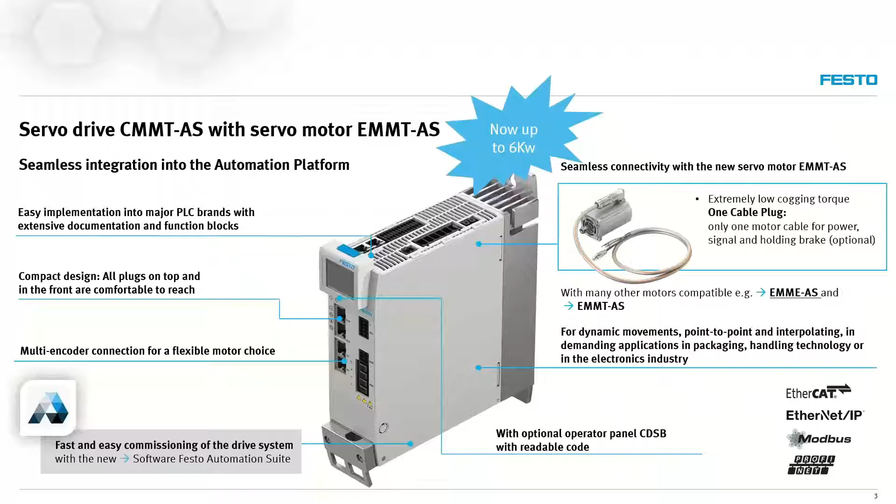So why would a customer be looking at this? Like we said, it's quite a highly compact solution. It's actually the smallest power-to-size ratio out of all of our competitors. So of course, for a customer, that'll save panel space and require less cooling.

We also look at the fact that it can be parameterized directly from the PLC. So imagine being able to, at 2 o'clock in the morning, replace a drive that's blown, and with the coding on the PLC, let's say on the HMI, you push a button, it sends the parameters down to the drive, and you're back up and running.

No technician, no laptop, and you're back up and running. Of course, the flexible protocols, like we mentioned, so for the main Ethernet-based communication, so Profinet, Ethernet IP, and of course EtherCAT.

One of the biggest benefits, I believe, is that we can program both our stepper drives and our servo drives from the same platform, so Festo Automation Suite. So for the programmers out there, it's one platform that can do both stepper and servo with the same function block, meaning it uses the same material to program.

And that's where it really comes into play. One of our biggest trump cards with our stepper drives is that we can run third-party motors, and that's of course with brake or without brakes. All of that is done here at the Experience Center based in Isando.

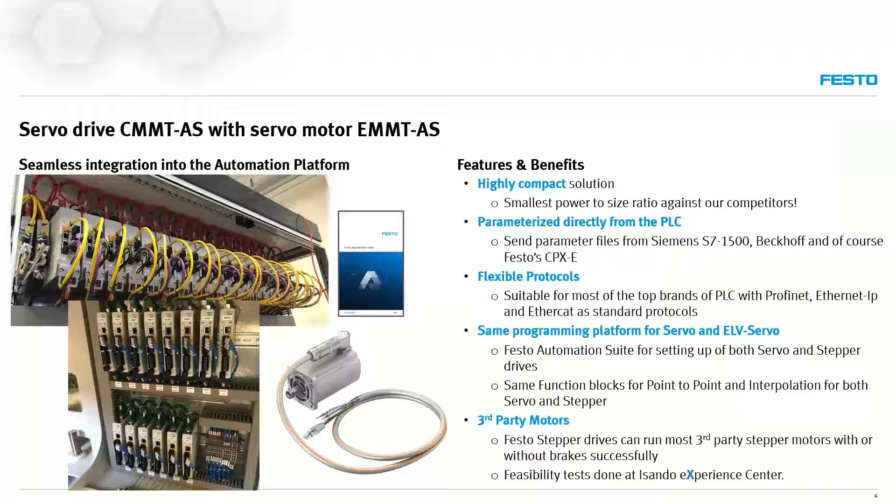Oh, perfect. Thank you, Marcus. On that note, from my side, I would like to introduce a pneumatic product. So this is a brake system.

If you take the example of a vehicle, your motor vehicle at home, you may know that your vehicle has two brakes. You have a dynamic brake, which you use during driving when the vehicle is moving to slow down or stop your car, and then you have a static brake, whereby if your car is parked or standing somewhere, maybe on an incline, you'd want to prevent the car from going anywhere, so you pull up your handbrake.

Similar to that, we've got the DACS, our pneumatic brake system that's completely new, just been released into the market. The big factor that's changed from what we had previously was that we didn't have the paper, the documentation to go with it - the statistics on how many cycles we can do, what's the B10 values, the lifetime expectancy of this brake, which is now part of the new system.

So we have tested it to conform to European standards in terms of safety, and this is a really wow product that we can use now. So the DACS, or DFLC, DFLG, depending if it is in combination with a cylinder or just on its own.

This is really cool - you can use it in multiple applications because all you need is a piston rod or a rod that goes through the brake so that the brake can clamp onto that rod, either completely assembled with the pneumatic cylinder or on its own.

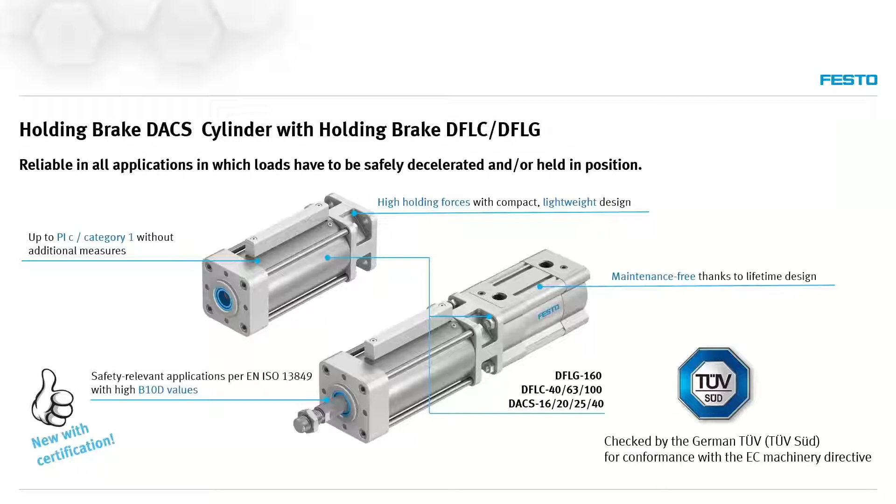Okay, so DACS, some of the features and benefits there for you. You'll see on your screens now some of the ratings, the rated lifetimes for the brakes that we have in our range, all the way from a size 40.

And what's new now compared to what we had in the past - we've never had above 100 size. We now have a DFLG 160. So it's a really big brake, about 7,500 newtons of holding force.

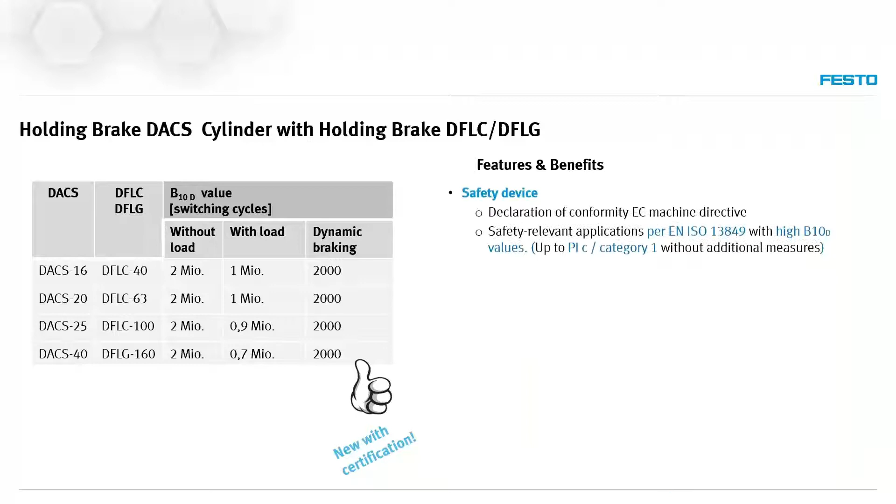It's really, really powerful. In terms of safety, the standard rating on the DACS is a PL c category 1 safety rating that we have standard with the brake without any extra features. If you, however, add sensing or regular checking of the brake, you can increase this to level D type safety rated device.

So keep that in mind for your safety applications, especially if you have press applications, vertical lifting items where pneumatics are involved, where you want to guarantee that in a holding situation or in an emergency situation, you're stopping your systems from running, preventing machine failure and also human failure. We don't want that at all.

So this could be a really good product for you. Static and dynamic braking, as I mentioned earlier, we have both features available. The static lifetime, of course, is longer. The forces involved are not as intense on the brake, so the lifetime of the brake under static loading is longer than what you would have under dynamic braking.

Maintenance free - a real big benefit here compared to our predecessors that we've had. It's maintenance free, so during the lifetime of the brake, you don't need to act or do anything to it. No maintenance, no adjusting, nothing. The brake works for the entire lifetime.

Performance - we've got higher holding forces than we've had in the past. We've improved the holding forces, and we've also reduced the weight of the component. So not only is the component lighter, which means you don't have to carry so much weight on your application, but also much stronger holding forces with the system inside.

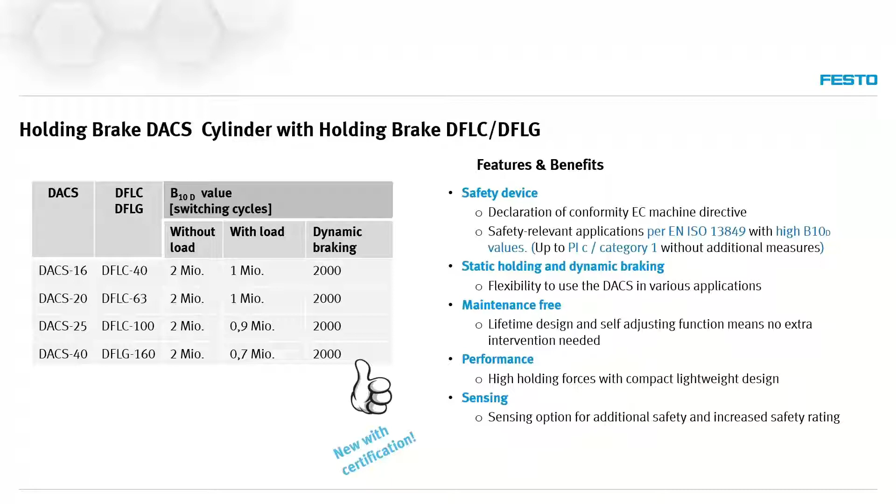So as you can see, very simple to install and easy to use product from our side. Thomas, the handbrake, I understand with these things, but what you just said about simple, it's like you're reading my mind.

And the product I actually want to take our customers through is the Simplified Motion series. In the past, Festo tried to bridge the gap between standard pneumatics and electrical axes. Electrical axes were always deemed more costly, and with the Simplified Motion series, we're looking at bridging that gap, bringing it closer with the added benefits of the pneumatic side.

There's a simple online tool, the online solution finder, which means the power sits in your hand as the customer. One of the benefits is that it's completely decentralized. We have a simplified motor, and all the control is done on this little keypad in the front - no need for laptops, no need for software, just straight there.

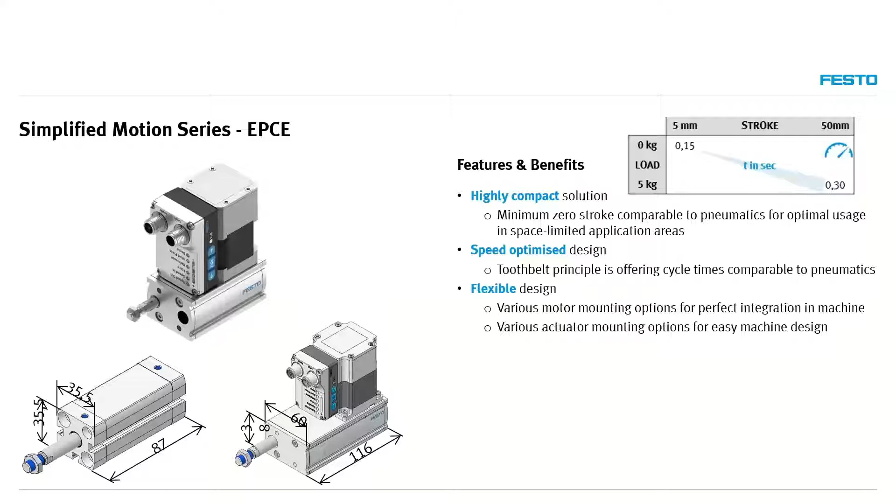It's also a flexible design - we've taken into account that we have to compete with the pneumatic side. If we look at the mounting, you can mount it in the front, at the back, or on both sides, depending on the application. The new piston rod options give you either a single rod, or a through rod system like on pneumatics, or perhaps a double cylinder where you can do a form of gating. It really gives you that type of flexibility.

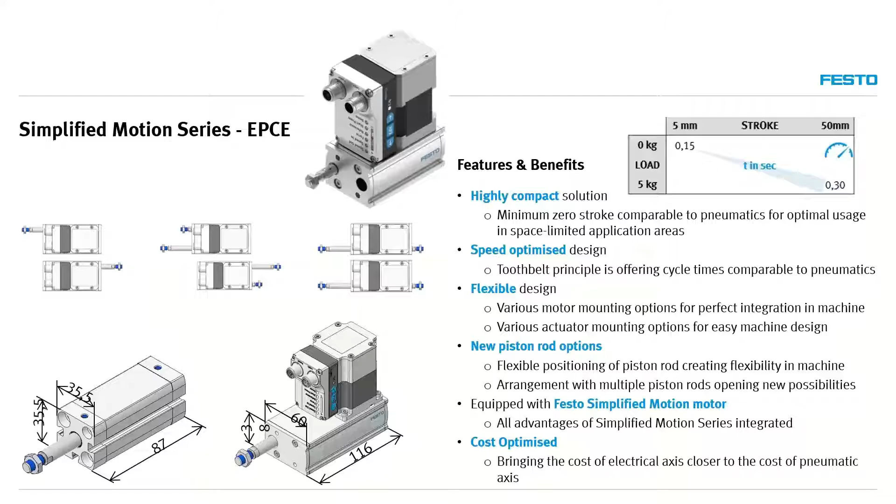Marcus, you read my mind. Speaking of cost optimized, I might have a product there for you for the process industry. So we're looking at process industry as a whole, right? We've got a brand new cylinder out onto the market for process industry.

You'll know this from general applications like wastewater, water treatment plants, any big bulk media that needs to be moved. We have cylinders that actuate gate valves, slide gates, sluice gate valves, pinch valves, any big linear gate applications where you require a cylinder.

It's a very cost-effective cylinder that does an open-close job, very slow speeds, low cycles, and therefore cost is quite critical. So we have brought out the DFPC, what you may know as a pancake cylinder, a pancake type cylinder. Very basic design, but very cost optimized.

So we have taken the best of both of our worlds. From the pneumatic side, we've taken our standard ISO type cylinders and integrated them with the more process-orientated side of the market, the DLP type range of cylinders, and we've created the DFPC. With the DFPC, we have both ISO standards integrated on the end caps - it's a tie rod type cylinder system with a Namur interface, and of course bore sizes.

Currently we've released 80 to 125 bore on the DFPC, which is available, and we'll increase this slowly over the course of the next 2 years up to about a 600 bore cylinder - the biggest ever cylinder size that we've had in our range.

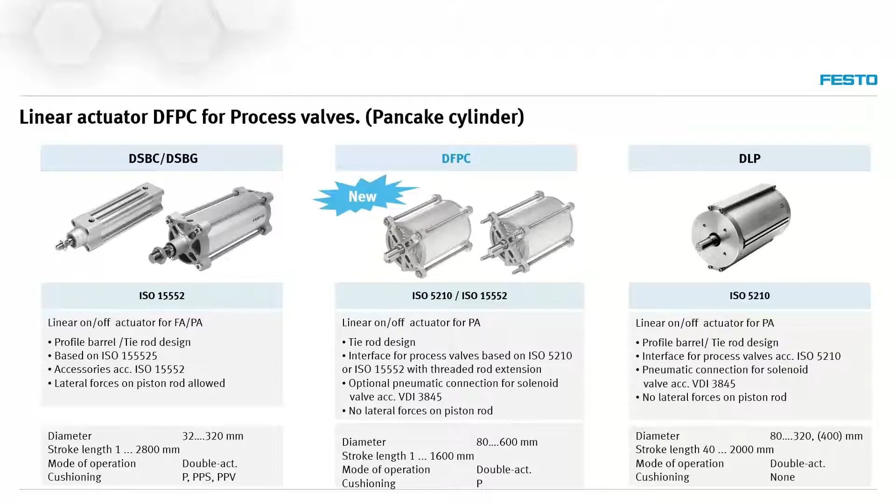Also keep in mind that in certain applications there's what we call a ram type cylinder. This is where you are pushing media that's very viscous, slow moving media like glue, very sticky substances, where you require a cylinder with heavy force, a big force cylinder, but really slow moving. So for those applications, this could also be the perfect product for you, the DFPC.

One of the key benefits here is being economical, a very cost-effective product for the market, so really bang on pricing. Complete portfolio, because of the ISO platform, we can now integrate some of the ISO accessories into the cylinder. We're looking at your clevises, rod eyes, FK alignment couplers, then also the sensing options for the cylinders.

All there with the Namur interface. You've got your Namur valve, so you can mount the pneumatic solenoid valve directly onto the DFPC. We've got the bore size range, we've released to 125 bore at the moment, but we will increase this all the way up to 600 bore. Our biggest cylinder currently in the portfolio is a 320 bore. So this really gives us an added edge to our product portfolio.

Then, of course, not to forget corrosion resistance. The cylinder has stainless steel components, so suitable for outdoor use. Keep your outdoor applications in mind for the cylinder.

All right, and with that, Marcus, do you have anything in the PA industry or PA range that you could show us from your side?

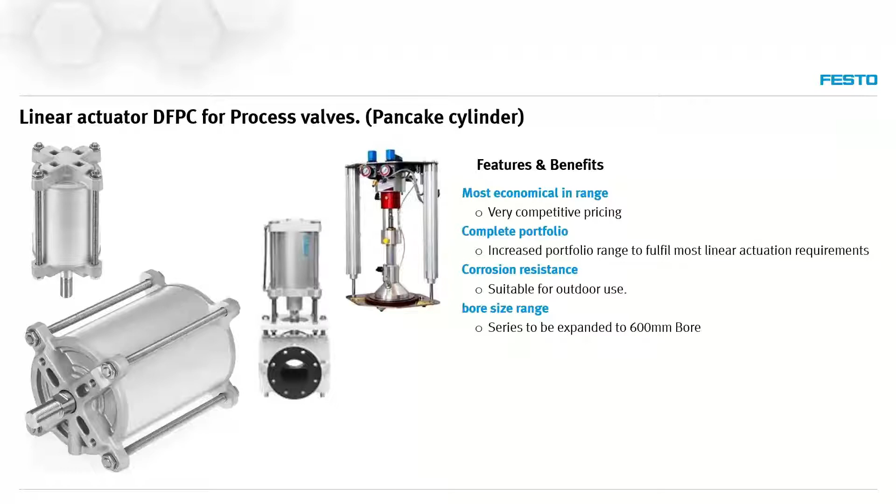Actually, I can, Thomas. And that's actually got to do with what we call the PA toolkit. The PA toolkit is a new standard of visualization that the process industry is adopting. If you look at the mass amount of PLC manufacturers out there, everybody's got their own standard, so the customer eventually has so many different options to choose from.

So if you look at the PA toolkit, it's what we refer to as a modular type package. It's standard animations, standard function blocks designed for the process industry, your PID loops, all of that standard graphics. And of course, that is available on the HMIs.

The HMIs are our new series of HMIs. The range is now expanded from 5-inch all the way up to 21-inch, so quite a nice big range of HMIs. And of course, these have an IP67 enclosure.

So with the PA toolkit, you need a bit of power behind it. All the HMIs are operating on Linux RT, so quite a powerful operating system, no longer Windows embedded, which traditionally was a bit slow. So quite a nice performance-based system.

You still use Festo's Designer Studio to commission the software, and you also have the option to do web visualization or remote target. So you can actually do the HMI design inside the Codesys program and display it on this HMI. We have 3 series of these.

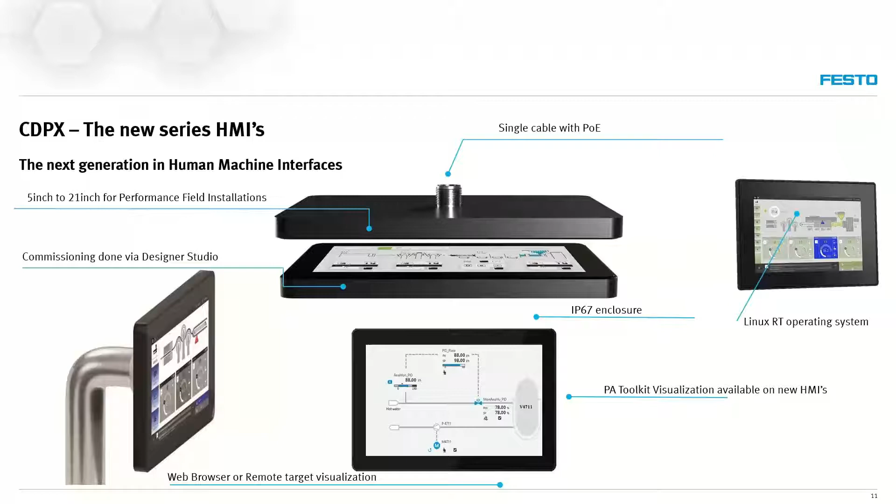We have what we refer to as the Performance Field series, which is the one that you see over there, which has power over Ethernet. It has one cable, which has Ethernet, the communication, as well as the power, meaning only a single cable into that HMI for the customer.

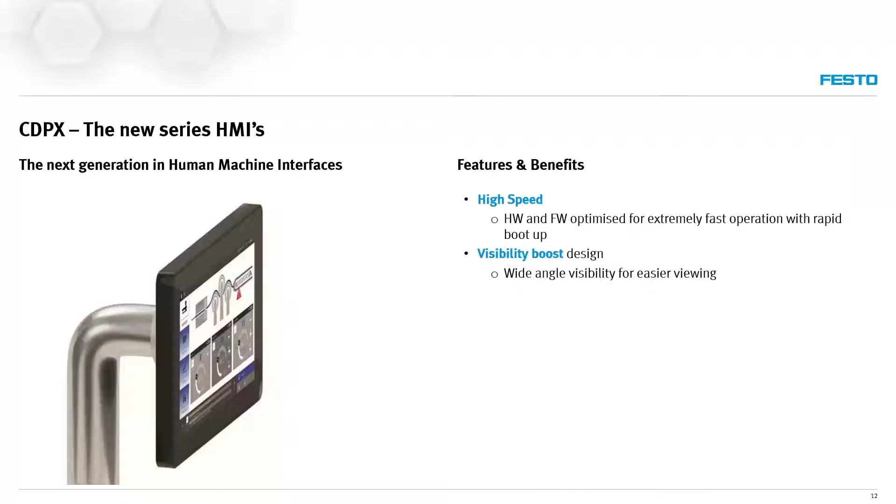Looking at things that set us apart from our competitors, we look at the speed being optimized by optimizing the hardware as well as the firmware. So we get a faster boot up from our HMI. For those of you that traditionally switch it on and always wait for the HMI to boot up, with these HMIs it's quite faster. Also improved visibility, so you've got a wider angle of view, and that's for machine operators that have to walk down the machine and still have a line of sight into it.

Of course, in the industry, we have to have some form of scratch resistance as well as UV and chemical resistance, and that's mostly because of the high quality glass enclosure that they've used.

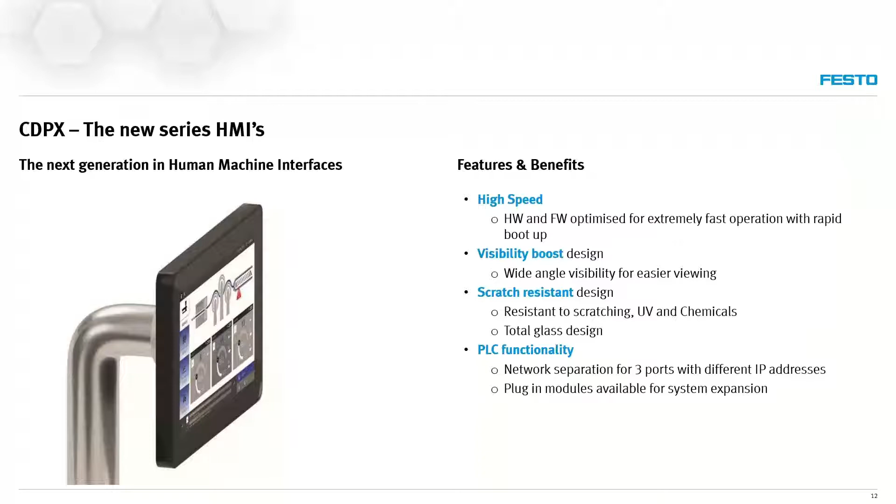And like I said, we've got 3 series: the Performance Field, which has PLC functionality included, so it has a full CODESYS version 3.5 controller inside. You just can't extend the I/O, but we do have a Performance Cabinet series where you can add the I/O. So it depends what you as the customer really require.

And for those of you that are budget conscious, we do have a budget friendly system called the B series, which doesn't include the PLC. So it is a polymer case, not designed for field installation, but for panel enclosure. Still has a very hardy construction, a resistive touchscreen, and supports HTML5 and, of course, OPC UA server and client. And, of course, a lot more cost-effective thanks to not having the PLC on board.

So with that, we look at a wide range of HMIs to suit our customers' needs.

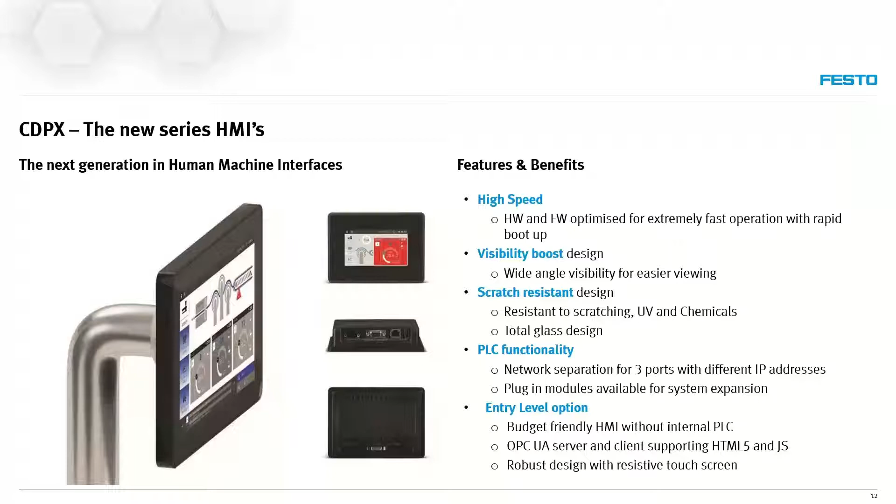Marcus, speaking of wide range, I might actually have a product for wide applications. That's an interesting point you make there, Marcus. So just a bit of a teaser here, something we'll release in the course of the year for wide applications. So if you have a big wide product that you need to grab hold of, this might be a solution for you.

We've got a DHPL long stroke gripper that we will release into the market now. The long stroke gripper, anything from about 20 to 200 millimeter gripping range. Really beneficial here for you would be that you can grip internal or external, so you can either hold the bottle from the inside or grip it on the outside. This allows for a lot of application examples or possibilities for this gripper.

Really nice feature. And then also sizes from a size 10 all the way up to a size 40 gripper, which gives you the option of forces between 20 newtons to about 500 newtons gripping force. 500 newtons, about 50 kilos, so it's a bag of maize meal - quite a bit of force behind this gripper. So really dynamic range for various applications.

Then of course another big feature of interest is that both sensor slots are included on this gripper. So no longer do you have to worry about which sensor you can use to mount on this gripper - you have both options available. So a standard T slot and a C slot integrated into the design.

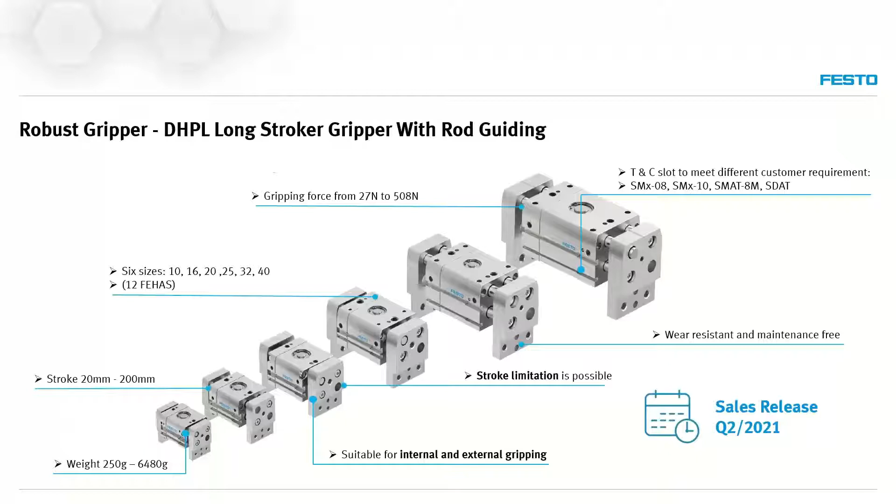And if we look at robotic sales globally, robotics is definitely on the up. So whilst we're on the topic of robotics, if we look at our electrical remote I/O, and where customers are trying to reduce costs, there's more ways than just buying low-cost components. It's thinking strategically, it's thinking futuristically. So if you look at our CPX AP remote I/O, that's ideal for OEMs or end users alike that have either decentralized systems or perhaps a system where the customer needs to add in additional I/O.

So the CPX AP is, of course, exactly the same as the rest of our electric automation portfolio. It comes standard with Ethernet IP, EtherCAT, Profibus, and Profinet. So with this, we give you high-speed data rate and real Industry 4.0 I/O for your industry.

And of course, that means you get things like cable diagnostics, valve cycle counter, and that's the information you need to be able to make decisions about your machine health. So it starts to introduce things like predictive maintenance.

And of course, all of this is done from a lightweight, small, compact little system that gives you all of this flexibility. So with that, let's have a look at, once again, why ours.

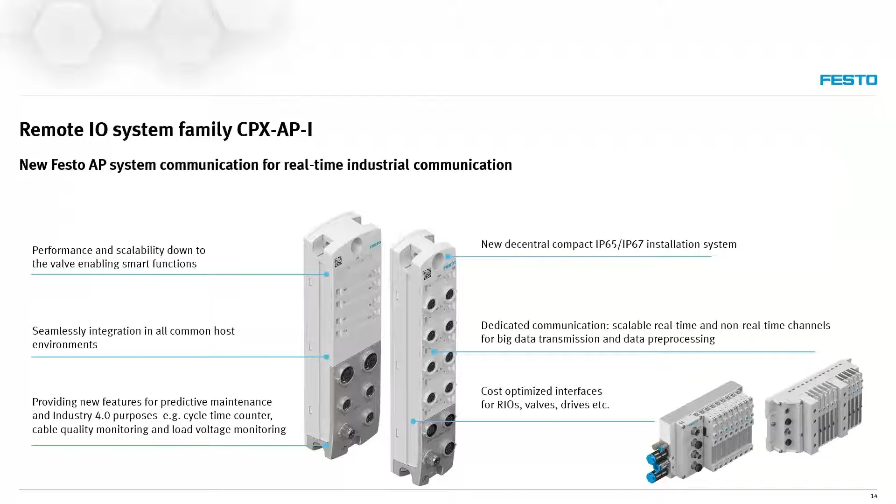So of course, high speed. If you look at our AP system, we can boast speeds of up to 200 megabits per second. That means data cycle rates of less than 250 microseconds, so getting data from the field at a high rate of speed.

So of course the flexible installation. Currently with this you can get line topology, and star as well as tree topology are coming. With that you can add 79 remote slave units, so one master can have 79 slave units.

And if you take into account the cable that you can run between units, 50 meters, imagine having 80 units with 50 meters apart - it's quite a distance. So you can have quite a long network running, with cable diagnostics that will tell you that between module 55 and 56 there's a problem, perhaps because of an energy chain. That, once again, Industry 4.0 giving you that type of thing.

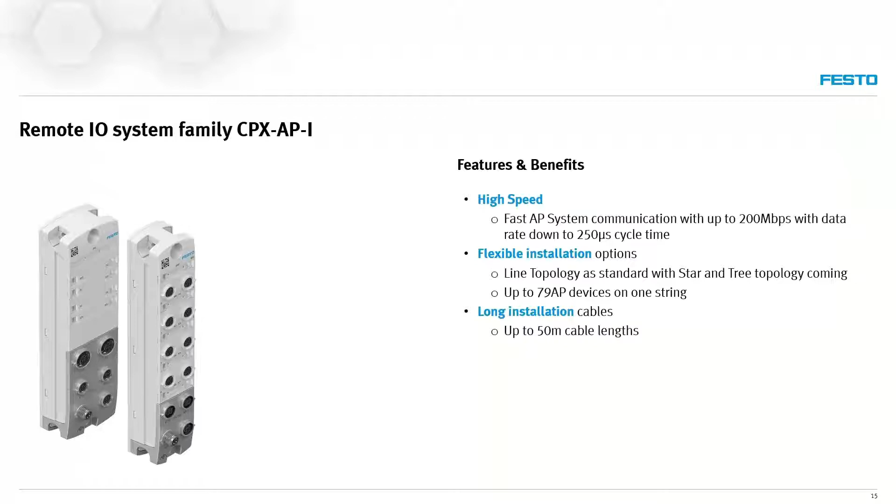So PLC integration, of course, I did mention Ethernet IP, EtherCAT, Profibus, and Profinet for the master AP unit. And the communication between modules is, of course, our Festo AP. But compared to the rest of the guys that have remote I/O, everybody has a similar system in the background - their own dedicated communication, with a communication port into the main PLCs.

So one of the biggest things about this is, of course, predictive maintenance, and that's where we need to go. We need to improve the overall effectiveness of the machine, so your OEE, get that up, and reduce breakdowns.

So imagine being able to say that that valve is nearing its end of life - change it before it breaks. Now you can schedule the stop. Your production planner is happy, your stock planner is happy, and your maintenance planner is happy. Of course your KPIs are met. And of course, all of that with cable quality monitoring.

So robotic applications is where we're ideal because of small, compact size, lightweight. It's ideal for robotic and energy chain applications.

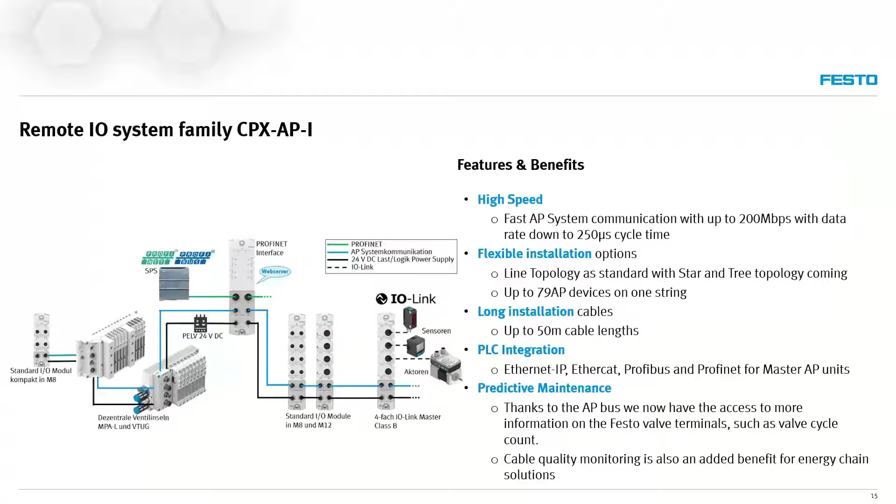Oh, thank you, Marcus. Speaking of compact and small footprint, I also have a product for a very small footprint. So we have our standard DSNU series that you should all be familiar with - our round bore cylinders, applications that have been around for 30 years.

They've recently gotten a facelift. We've automated the production process, so they're completely 100% automated. But with that, we've added a second range to the DSNU, which is the DSNU-S, the S being space optimized. So the idea here is to really save space and weight in your applications.

As you can see with the DSNU-S, you're up to 3.5 centimeters shorter than a standard DSNU cylinder. You're up to 40% slimmer. So the whole design is slim, sleek, flat, smaller.

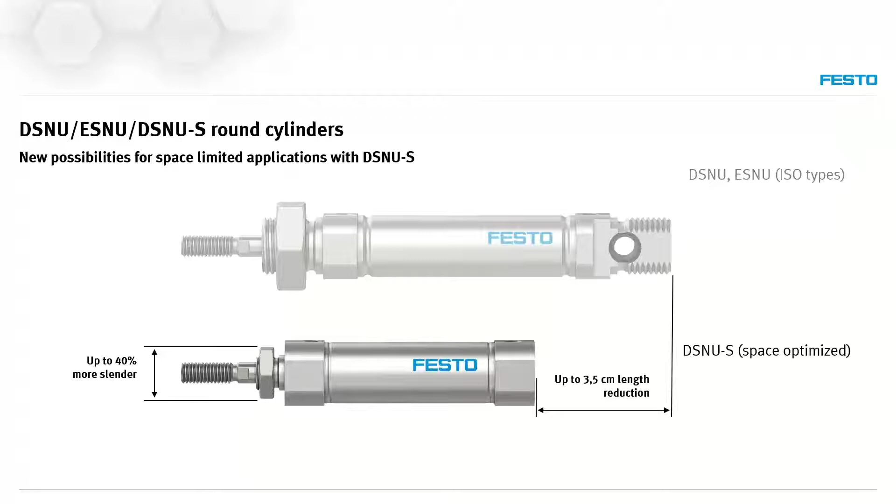So really for your tight applications where space is critical, where you've got no room to maneuver, or you're interested in weight - as little weight as possible when you're moving items - this could be the perfect product for you. Keep that in mind with your designs or systems. Think of conveyors - they tend to be very tight in space to move levers or items on the conveyor, so this could be a really good product for that kind of application.

So just some differences to note. The DSNU-S, being more compact, is not an ISO series type cylinder, so it doesn't conform to ISO. In order for us to get it as small as we could, we had to do away with the ISO type system. But that also means it's not interchangeable with the standard DSNU and has different thread types.

But that is the focus point here, being that it's small and sleek and slim. So the range focuses on the smaller bore sizes, from an 8 to a 25 bore, and then just standard P or PPS type cushioning.

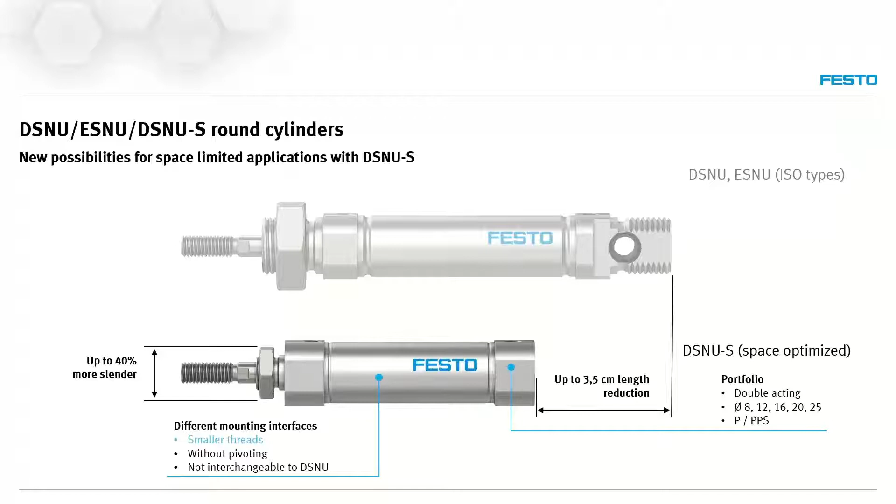So Thomas, on that point, is that why we're presenting here? You the slim and I'm the not so slim. I'm seeing where you're going with this. Thank you, it's all sleek here.

So from the standard DSNU range, as you know very well, a very versatile system with lots of options on the DSNU range, I just want to highlight two that we've added recently.

One is a Viton type seal, front seal for better chemical resistance - for certain chemical applications you could use a Viton type application. And then, of course, another version, we've upgraded our low friction type cylinder for DSNU. So keep that in mind with the DSNU range - there's a low friction application cylinder.

Accessories for the DSNU-S. Keep in mind, because it's not ISO, the standard ISO accessories don't fit. But we do have special accessories for the DSNU-S, still available for your applications.

Reduced commissioning time. We're about to release our SDBT, our programmable sensor. So instead of the standard reed switch, we now have a programmable sensor that we'll add to our cylinders, which means no longer do you need to set up cylinders. You put it into the end position, connect it, leave it. Once you start the system, the sensor will program itself to its end position and give feedback to the PLC.

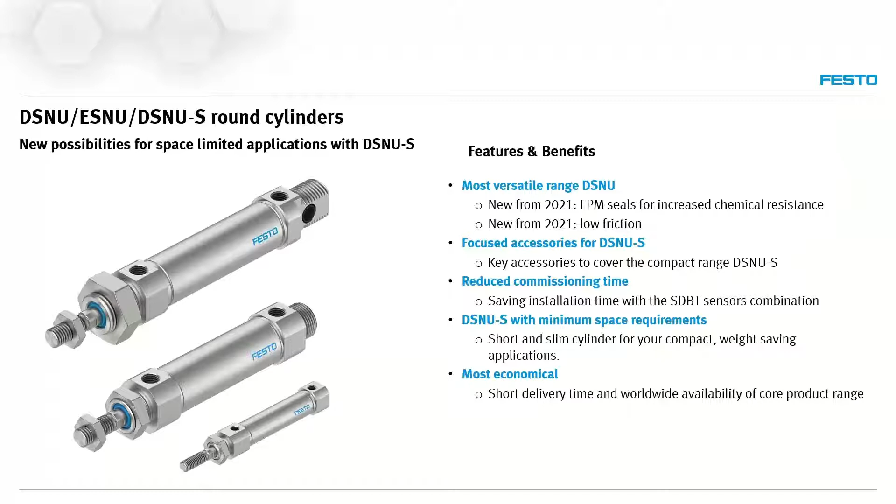Talking about economical, if we look at the mechanical industry - our belt drives and ball screws - there too we need to look at more economical solutions without cutting on quality. So if we look at the new product range, the ELGT, it's a completely new design. You'll perhaps see it looks completely different to the Festo traditional systems, because we need to be competitive in the handling systems.

In the ELA, electronics and light assembly industry, we have two types of scenarios: a cantilever system, which you'll see on screen, and a gantry, which I'll show now, where a gantry has a second axis to support the load. That means an additional axis, additional cost, just to carry half the load.

So what Festo did is look at the market out there, look at the requirements, and based it on what our customers need.

If we look at the system, we have the option of a hard cover - that's one of the first new things you'll notice - and the actual axis moves around it on the side. You'll be able to see the carriage is actually on the sides of the hard cover, which gives it the flexibility of being able to put your own carriage plate on it to mount whatever you want.

So let's say you've got a camera on there, or perhaps a barcode printer, and you want to be able to move it up and down. You could make your own adapter plate to suit your application. That's convenient - definitely.

We've got three sizes, starting at 90, then 120 and 160. What I like about this design is that 90 is 90 millimeters wide, 120 is 120, and 160 the same. The guiding is where the actual benefit comes in.

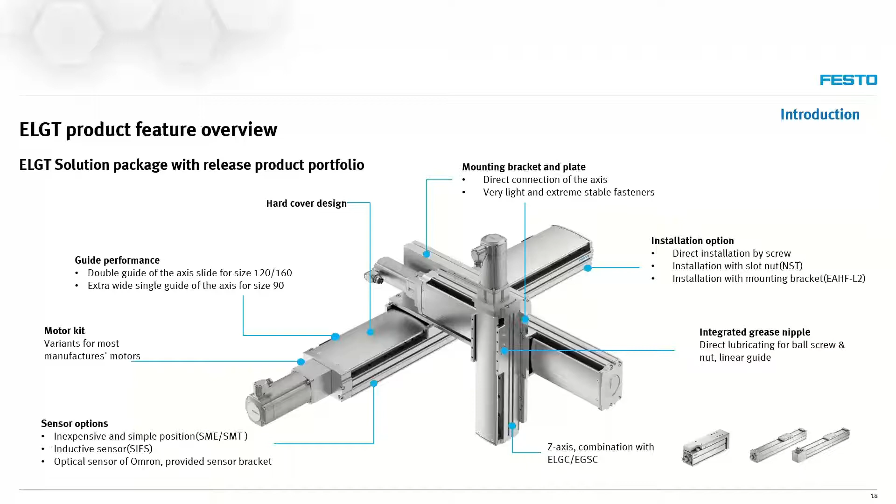So showing you from a supply perspective, from a mechanical aspect to the electrical connectivity, and of course the intelligent connectivity with that. We've managed to get rid of the second axis, which saves the customer not just the maintenance aspect, but a cost aspect as well.

We've looked at flexible motor options. With the majority of our customers having the flexibility of choosing the servo technology, we have axial kits that can handle most manufacturers out there in terms of motors.

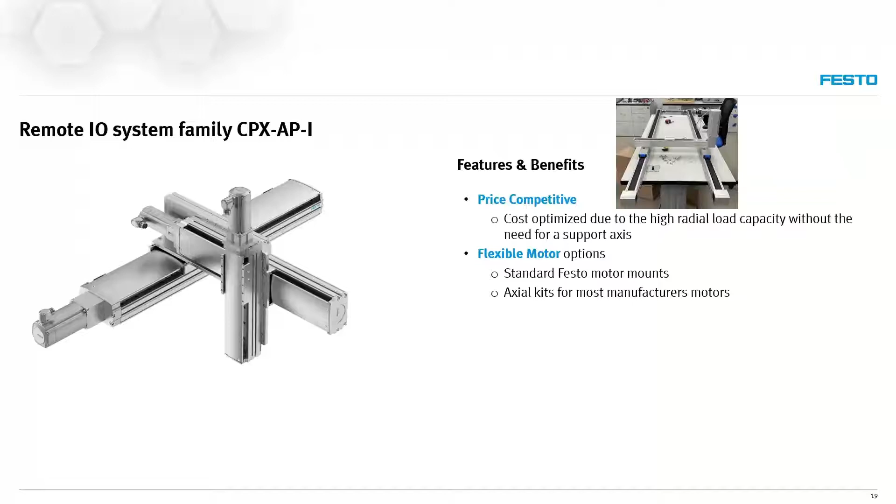We did mention the flexible mounting options. That really stands out to me, being able to mount it with a profile, slide it up and down for alignment, and give the customer the accuracy that they really need.

And then, of course, direct greasing points. So for the size 90, with having one guide, there's only one grease nipple. On the size 120 and 160, two grease nipples, one for each of the guides you get in there, and a secondary grease nipple for the spindle nut. That is ideal for regular maintenance and to ensure that your system is dirt-free, contamination-free, and will get the life cycle out of it that you require.

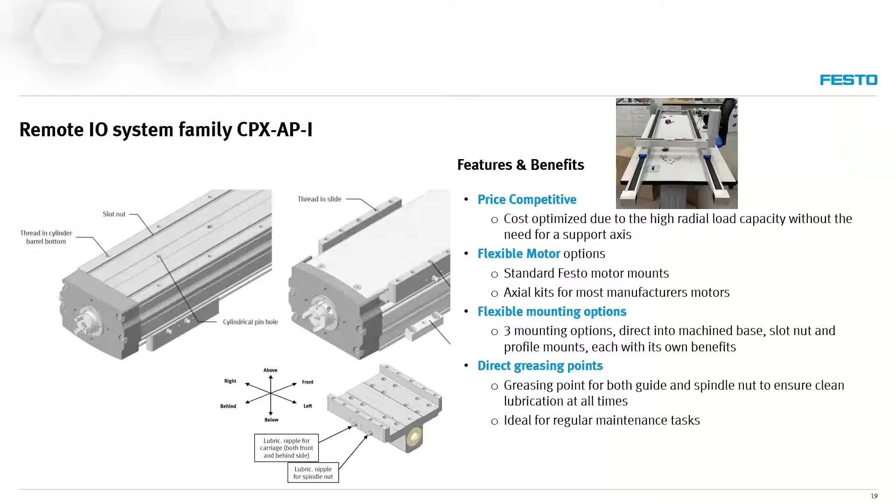That is interesting that you mentioned maintenance, Marcus. I might have something there for you. Moving us a little bit away from the standard products, heading more into a software type environment, we have a maintenance system, a tool that will cover your maintenance tasks in your plants, your production lines, or your machines. If you are involved in maintenance, we have what we call Smartenance.

Smartenance is a software tool that will manage your maintenance processes for you, whether managing your day-to-day maintenance on your machines, or even the breakdowns, looking at what is required for maintenance and giving you an overview.

Smartenance is really, really flexible because you can define how you set up Smartenance, be it for the machine or for the production line. You can add multiple machines, you can add multiple lines, so you have complete autonomy over how you want to structure your maintenance system.

With Smartenance, you have the ability to actually control what is happening in your maintenance environment. You're going away from the pen and paper type environment, trying to make little notes on whiteboards, etc. Everything is now on the web.

With the license system, we have different licenses, as you'll see on your screen. The basic license will be just the autonomous maintenance management system, but as we go up with the advanced and premium options, we have added features.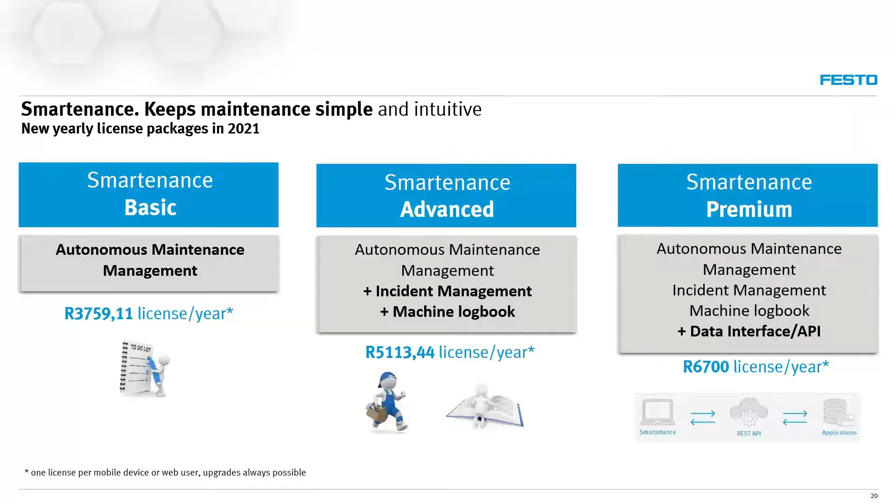So some nice benefits for Smartenance. It saves you time, moving away from pen and paper and having to remember what were the maintenance routines on the machine last year. Once you're logging everything online, it's saved for you on the cloud, so you have exact reference of what has happened for your machines, and you can improve your maintenance. Of course, efficiency - it's online, available 24/7, data is always there for you. You can really use that to your benefit.

Easy rollout. Smartenance is very intuitive, easy to use, easy to set up - sign in, create your machines, create your tasks, easy to attach links. So the staff on the shop floor, the maintenance team, will have access to links, videos, tutorials, documentation - everything's available for you to link in Smartenance.

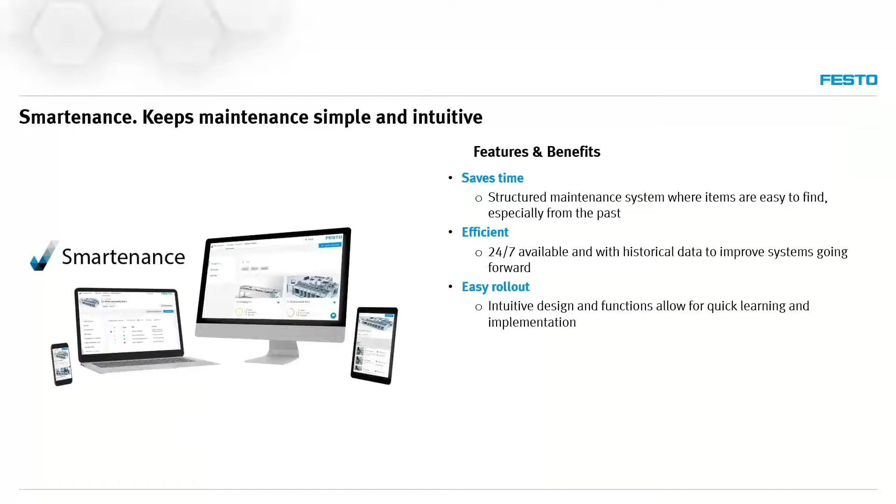It's educational, because with all of this information, you can use Smartenance as a platform to train your maintenance teams. So if you have new personnel or you're changing personnel, it's a very easy way to show them how maintenance is done on certain machines, what is required, what the tasks are, and when they're scheduled for.

Really cool. And then, of course, the Industry 4.0 aspect here - with Smartenance we're going to another level. We're going from the product level into the cloud environment. We are saving information, we're sharing information, we are starting to become smart in how we deal with information. So no longer reactive, but proactive. We're working towards stopping things before they even happen, to reduce your total cost of ownership on machines, making them run efficient and effective.

So, Thomas, on that, if my wife wants to buy it, please don't, because I don't want her to have the control of all of my maintenance tasks.

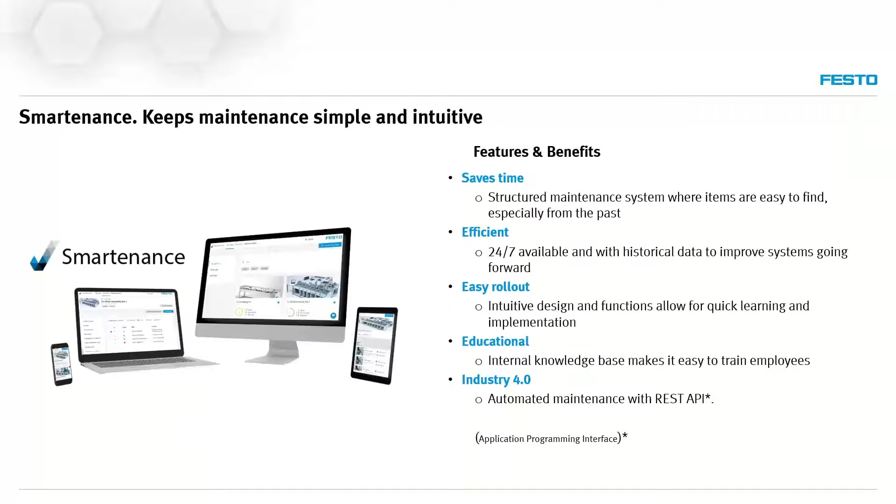But whilst we're on the topic of software, Festo globally has recognized that there's a need for going digital. So when we look at tools, they can also be digital, and that's where Festo's tools really come into play. If you look at the new electric sizing, which is a simplified design tool system, the customer has the flexibility of calculating from a single system to a multi-axis system. And of course, available on our website, that's where all of our tools are located - from electric sizing to HGO, there's so many different options.

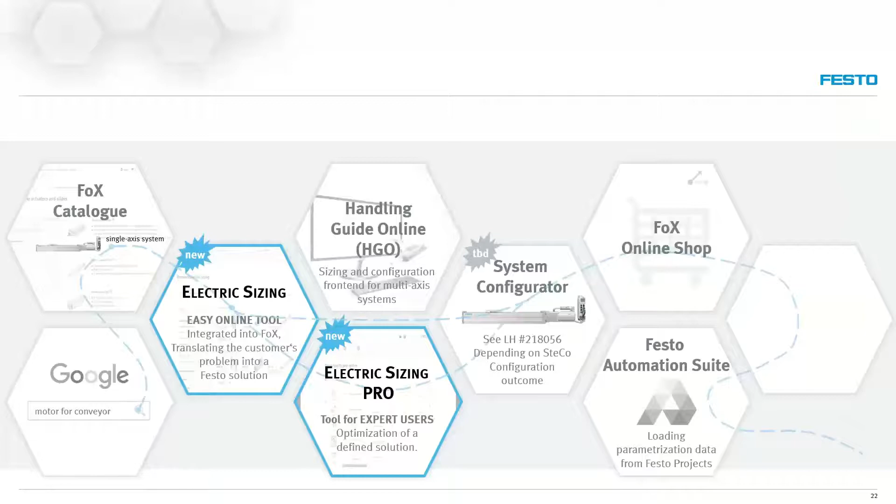Did you know that roughly 80% of a machine's cost is made up of things like the conception, the design, the drawings, the commissioning - that's where the real cost comes in. So Festo's tools are designed to actually reduce those costs, the intangible costs which are difficult to justify at the end of the day. So imagine being able to do a design of a machine in a fraction of the time - that's where the value sits. If you monetize that and say I've saved you 3 days of design time, you can equate that to 15, 16,000 rands worth of saving.

So if you look at some of the Festo tools we've got to offer, we start with Positioning Drives - that's free software you can download, and in that you can do calculations and it will give you solutions based on your dynamic characteristics. We also have the Handling Guide Online, one of the proud tools of Festo, where you can design a system with an energy chain, with all the brackets, motor, sensors - everything included, in under 5 minutes.

And that's where we really look at, even a day's design is roughly 8,000 rands of design cost that you've done in 5 minutes. Wow, that's really incredible. If you look at the Simplified Motion Series online calculator, that gives the customer and the sales engineers the benefit of being able to do basic pneumatic calculation for the Simplified Motion Series online. Of course, we also look at Fluid Draw - with Fluid Draw you can do not just pneumatic drawings, but electrical schematics as well.

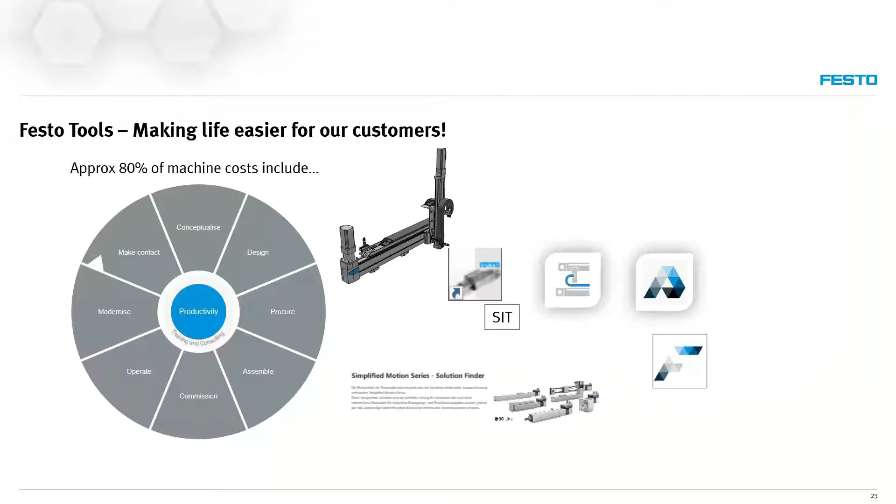That's incredible. Of course, with Fox, our Festo online experience is busy rolling out, so keep an eye out on our website for more about the Festo online experience coming out, once again creating the simplicity of being able to order online. So if you look at systems like our online shop, that's where customers can order at their leisure. They're not bound to operating times.

So of course, electric motion sizing, that's our latest one. We're hoping to get that launched by the end of Q2, so keep a lookout for that one.

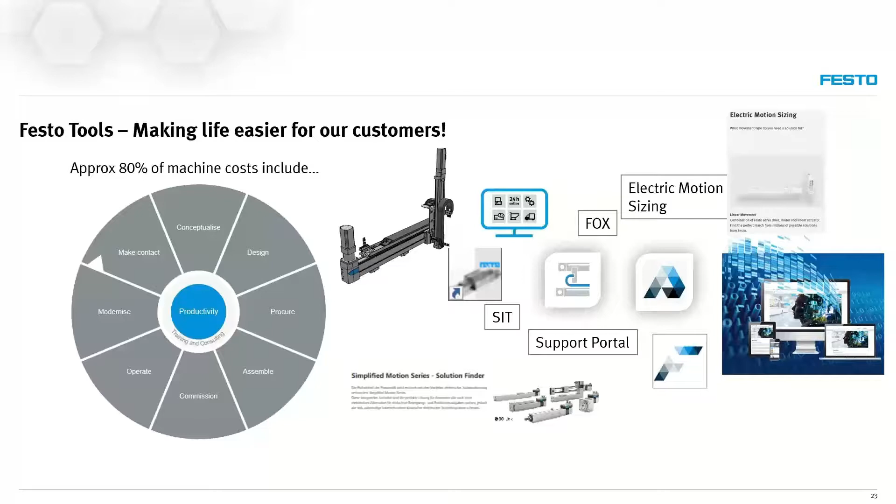And then from there, it's back to you. What have you got to end the day for us? Yeah Marcus, one final product from our side, from my side, now process automation. So moving back to the process automation environment, we've got our pneumatic valves, a pneumatic actuated process valve, which we call an angle seat valve, or is well known in the industry as an angle seat valve.

So just an overview, we've got the VZXA, which we've launched. It's our top of the line angle seat valve range. This is the one that everybody's rushing in the doors to get. So really cool features, covers almost everything in the marketplace. We've got from a 1/2 inch to 2.5 inch, covering 95% of standard size applications.

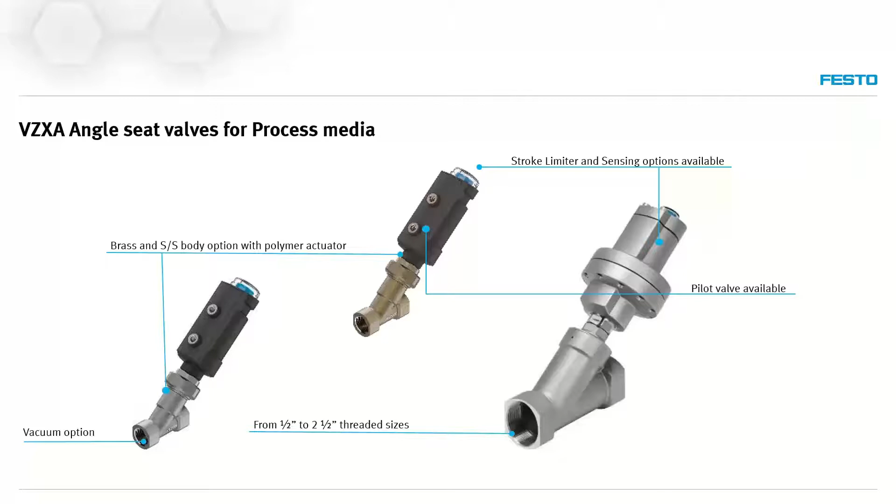Pilot valves that we have now in-house as well. Sensing options, a few of the features that we've released this year that I'll demonstrate today. We've got the standard stainless steel range, and now we're adding a brass polymer type actuator as well to that range. Some of the really nice features launched this year are stroke limiters, so you can now limit your opening stroke or your closing stroke.

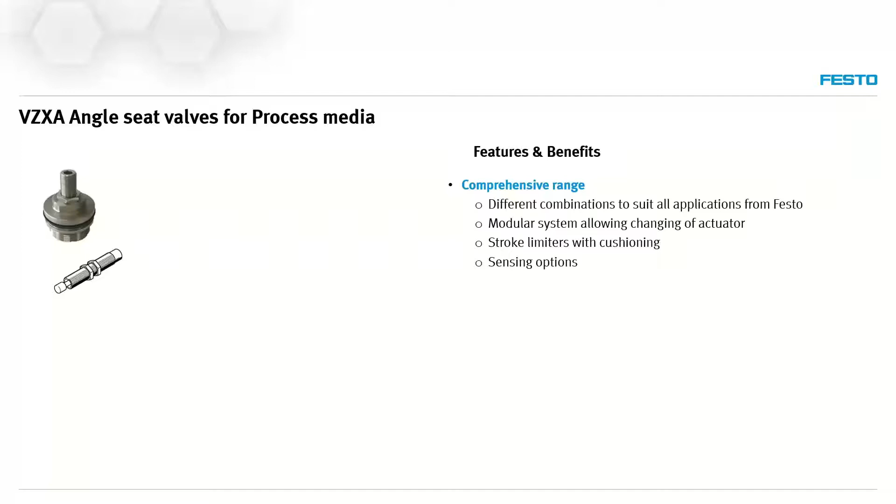For certain flow applications, you might want to limit how fast or how much flow you have. You've got a standard stroke limiter, or with cushioning, you can add an M12 type cushioned cylinder, which allows you to limit your stroke softly if the application requires.

Then, of course, we have the sensing option. We have T-slot sensors now that you can add to the VZXA for process reliability, safety and feedback. You can now check your process status, whether the angle seat is open or closed, and give that feedback to your control system. Then, of course, the stainless steel option is repairable.

Real good value here in your total cost of ownership for the angle seat valve. If the angle seat inside and the seals wear down or fail, you don't have to open the pipes, strip everything out, remove it. You simply switch off your media, remove the actuator, remove the cartridge, put in your new cartridge, put on the actuator, and you're good to go. A real benefit in time and cost saving, because you only have to replace the cartridge and not the whole angle seat valve.

So on the stainless steel range, real big benefits. Vacuum, we now officially have vacuum in the documentation, so the angle seat valve can run vacuum. Just note, use that for below the seat or against the seat flow type applications for vacuum. Works really well up to -0.9 bar, or 100 millibar of vacuum you can create running through the angle seat valve. That allows us to add a whole different set of applications to the angle seat range.

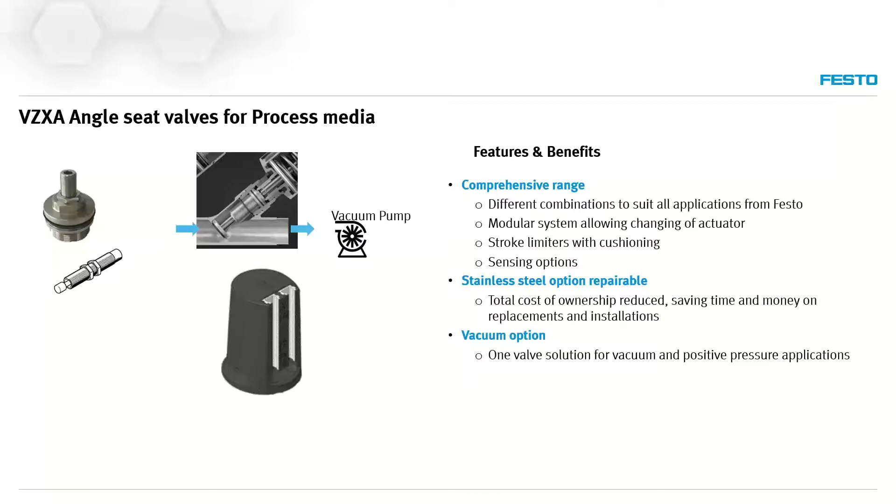Pilot valves, so we have started to release our pilot valves. They're really beneficial because with male and female thread, you can screw them directly onto the angle seat valve, so gone are the days of extra accessories, etc. It's one compact unit, one compact system.

And then, of course, not forgetting the brass polymer variants. For a very cost-effective option in the range, we've got the brass polymer valves, which should be released soon. That is also completing our VZXA range that we can offer to you. So please have a look at it. They're really cool valves, these, I love them. I think they're selling really well, and we will do wonders with these valves. There's lots of opportunity in the industry for this.

Awesome, Thomas. I've heard the guys rave about it, so I believe it is one of the process valves of choice in the industry. So from my side, on the electrical side, I'm done.